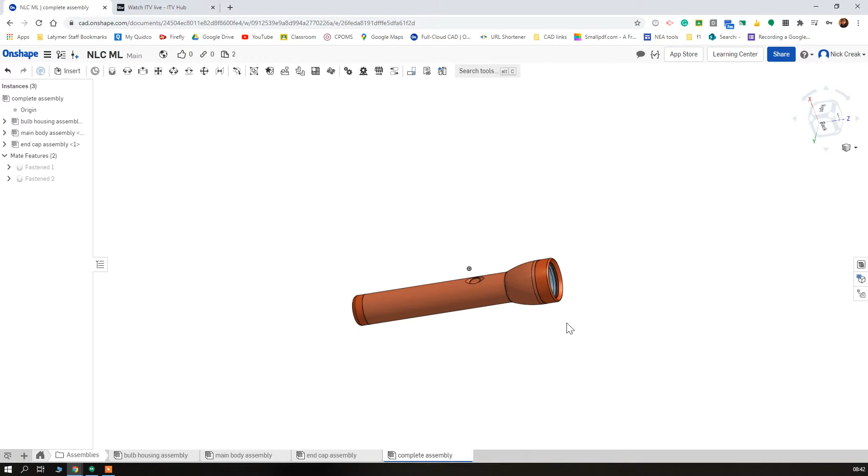In this video I'm going to show you how you can do exploded views. So I'll show you one I did earlier, like any good Blue Peter presenter, like this. And this is a really good method of showing other people the different parts and the way in which a product goes together. So this clearly illustrates how this product goes together.

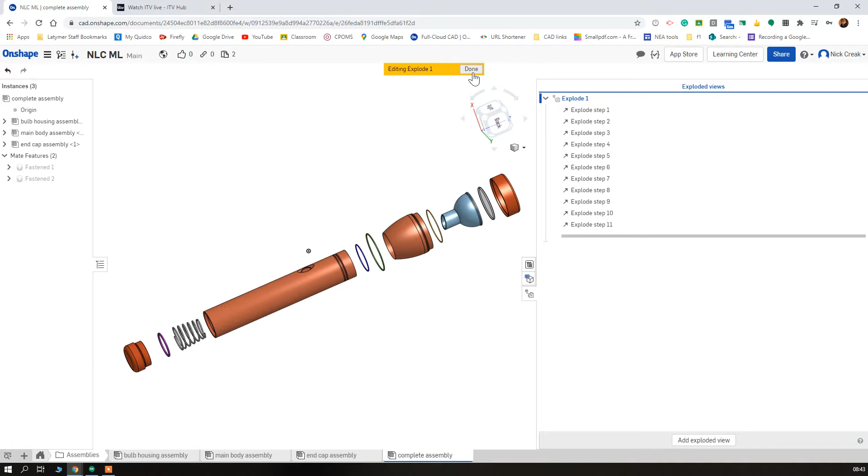So when you enter your complete assembly, on the right hand side you'll have three boxes here. We're going to be concerned with the bottom one, which is called exploded view. We're going to ignore my one I've previously created and we're going to click add exploded view.

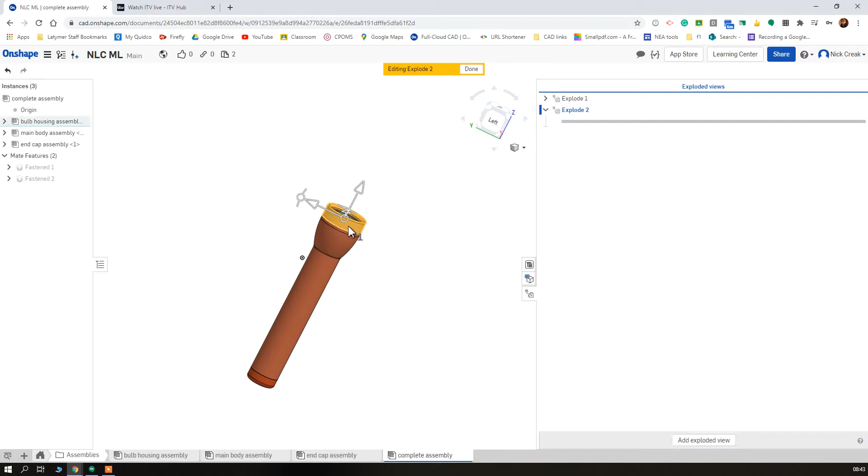From here, this is actually a really simple process. We just click on the part that we want to move and we drag it out on whichever plane we want to drag it out on. So I'm just going to drag it out in this direction because we've done them all on one axis. If we wanted to control the exact measurements, we could do, but we're going to do this by eye.

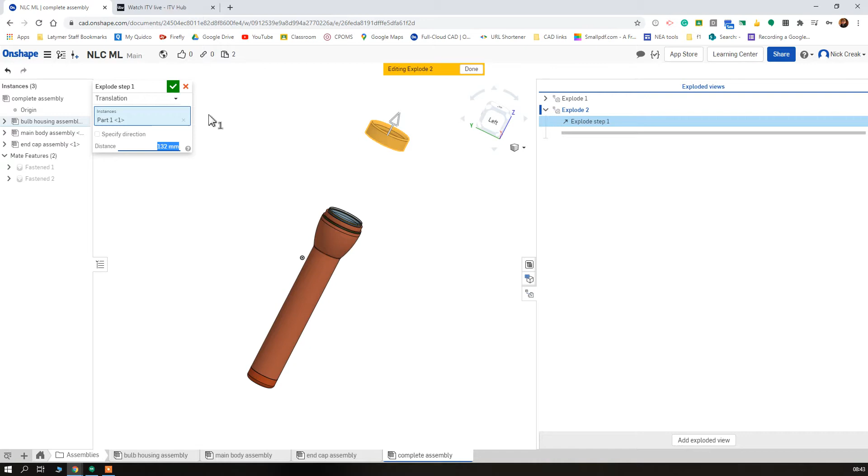This is quite important: for each part you must click the tick after moving it. You can then click on the next part. So I've got the lens here. We can move that up.

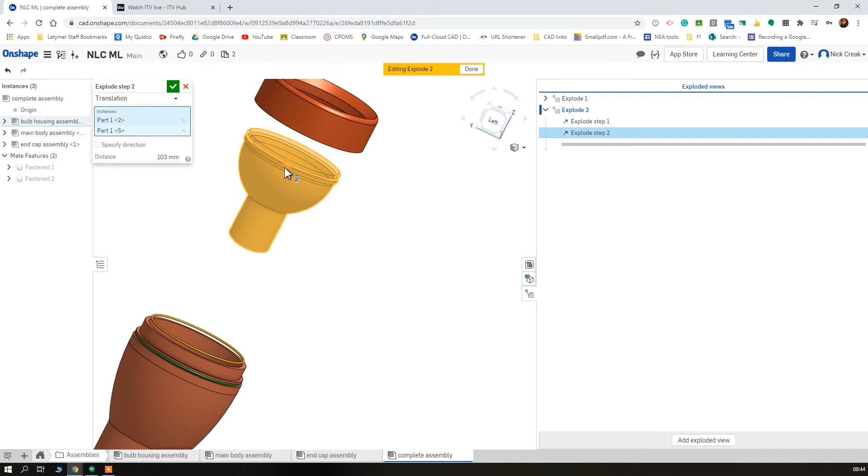What will happen, I'm sure you'll do it because I've done it a couple of times, if you accidentally click on a second part, you'll see it's taken two parts and it's moved them to exactly the same spot together. If you do that, just click the X and then click the tick.

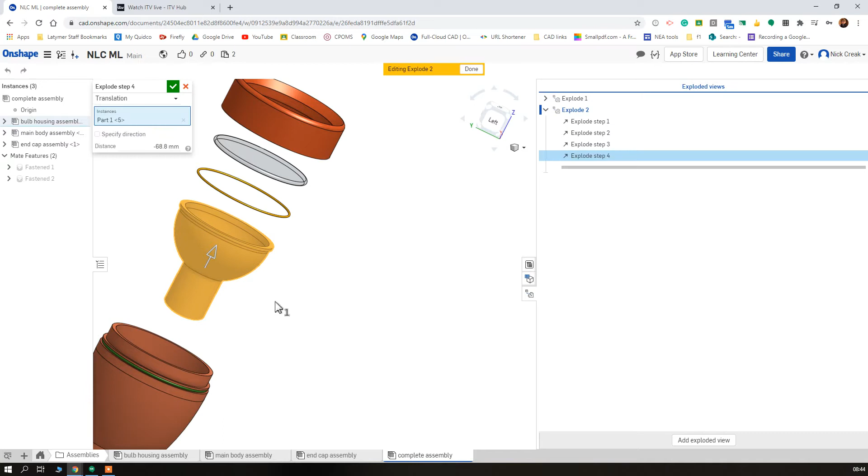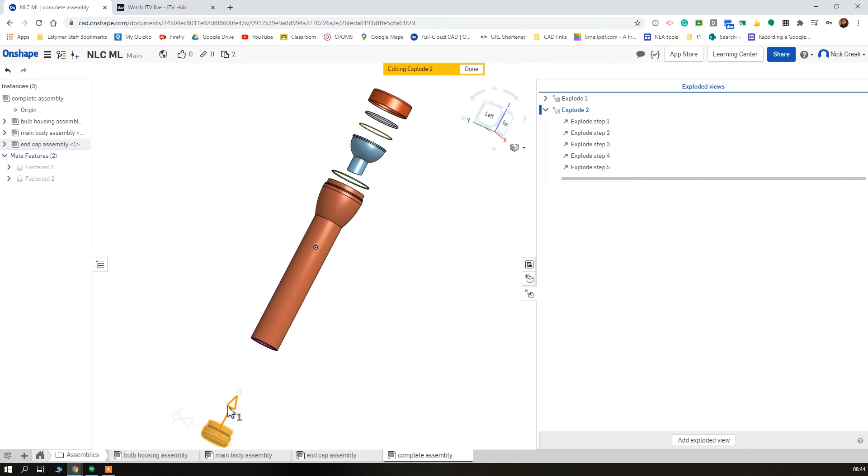So you're then just going to go through in the order that you think best dictates how you move and in what order, or how far and what order. So I've gone to about there so far. Now you can do this in any way you want. You could move those further and then move the bulb housing, or you could then go to the bottom, create quite a distance.

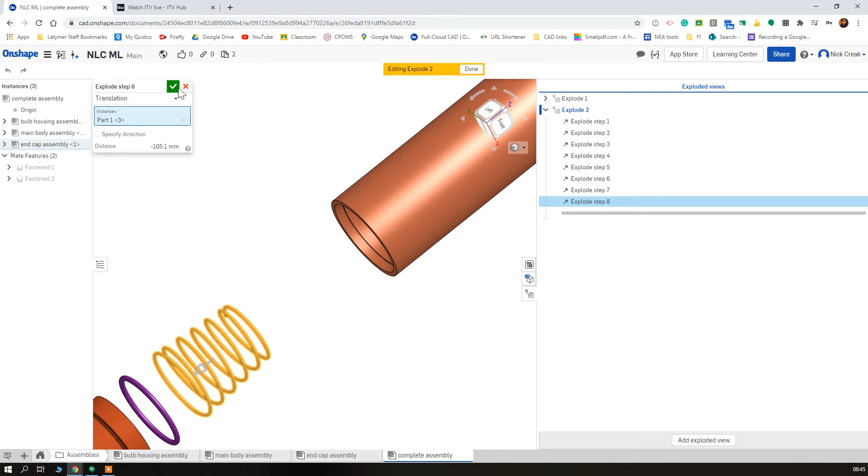Sometimes the parts are a little bit hard to select, so it's worth zooming in and just making sure you've got each of the parts you want. You can obviously change to translucent and different views if you want to use that to help you out. Move the main body down a bit.

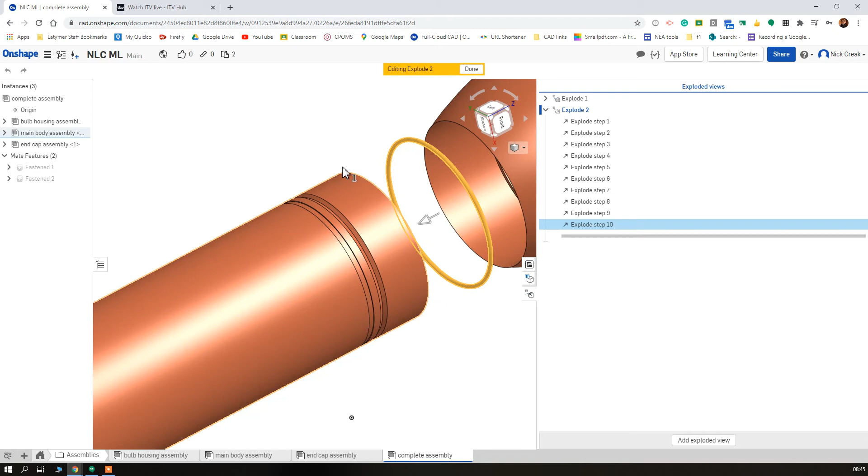And then there's one more, which should be just this one here. Just needs to come down. Once you've done that, you can take your screenshots and show. Now one part I haven't got, which you may have added if you've done the extensions, is the button, and I would suggest the button comes out on this plane or in that direction.

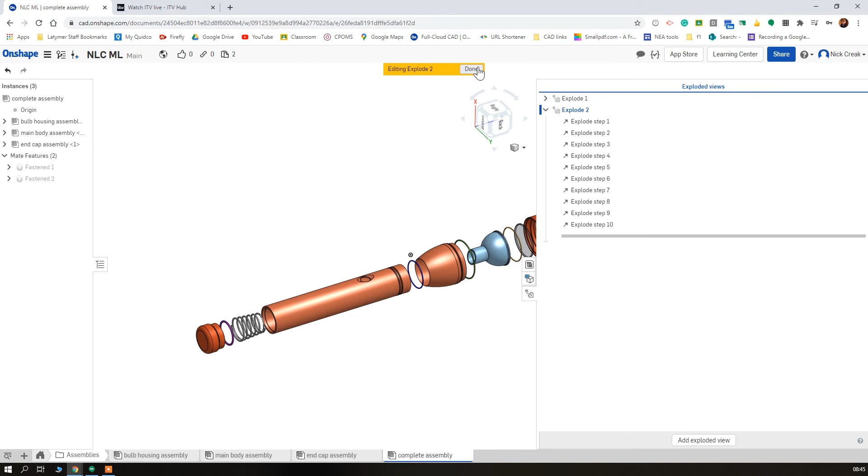Once you've done your view, you can click done and it will go back, or if you want to reopen it, you just have a look on this dialog box on the side here. So you can see I've done two different exploded views because you might want to do an entire sub-assembly or the three sub-assemblies depending on what part you're doing.

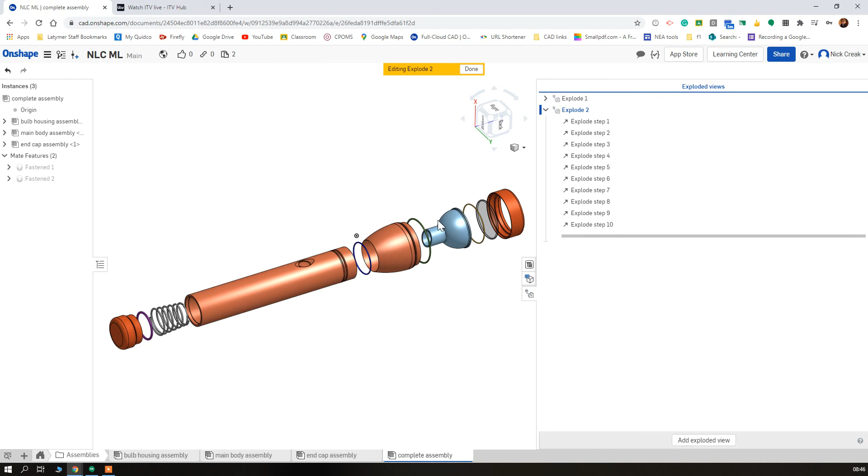But if I double click on there, I get back to all my exploded views, and again I'm done and I go back to normal. And if you want to hide this, just click on that as well. And this is an amazing way to present all the work that you've done so far and really show off your CAD skills.